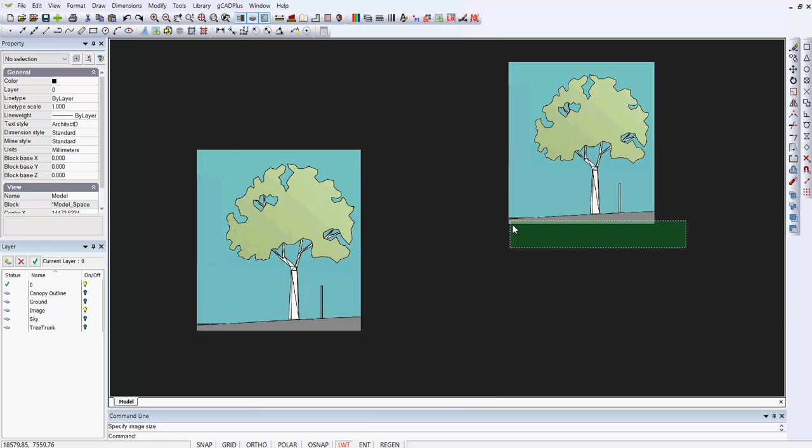So I'll delete it. The next step is to trace over the various elements in the logo to make a CAD version of what was a file done by a graphic designer. Well, if you've been following along with the other movies in this section, you'll know that it's relatively easy to use the polyline command to trace over the top of a graphic designer's logo. So we're converting the graphic designer's logo into one that we can use, and it's just Draw Polyline.

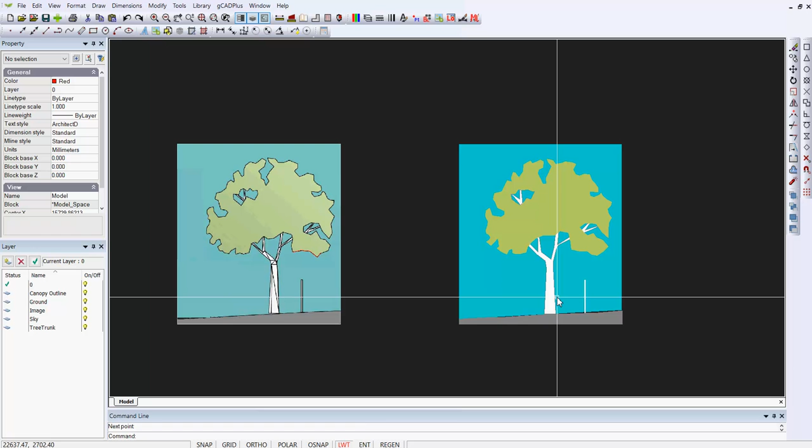I'll zoom in on the canopy, and I hope you can see, because I've got drawing colour set at red, the red line just follows around the external of the polyline. So I'll hit escape, and that's left a little polyline there which I will remove in a moment. But everything on the right hand side is a CAD entity. So if I pick, say, the trunk here, it's a polyline.

So at this point we could just get rid of that graphic, and we'll get rid of that one that we just threw in there. I'll take the trouble to go to Format and Images and just delete that reference, so that's gone. So now we have our graphic ready to become a logo. I think you'd probably want to add some text to it. You might add the text underneath here.

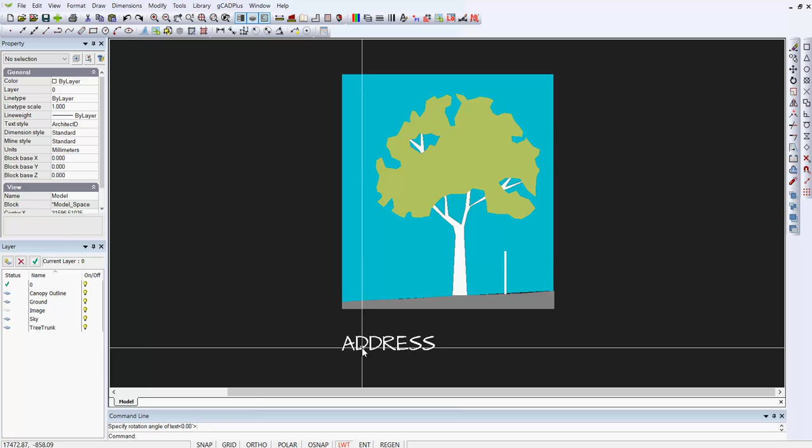So let's change our drawing colour to by layer, and we'll say Draw Text, Single Line Text, and we could put the address in and put it there, and maybe a height like so, an angle of 0, and then we could copy that, and we could change that piece of text to My Design Studio.

So we now have our little graphic piece of text. That'll be your Design Studio name and the address, postcode, whatever information you want on it. Although this is probably enough, you might even leave out the address at this stage, and we'll just have My Design Studio, and we can add the other later when we form a title block. So this is a logo, and this is the point to save this as a separate drawing, and we'll do that right now.

We'll go File and Save As, and we'll put it on the desktop, and in fact I'll take caps lock off, and we'll call it Logo Pass 01. So we've saved it. It's a good habit to get into that.

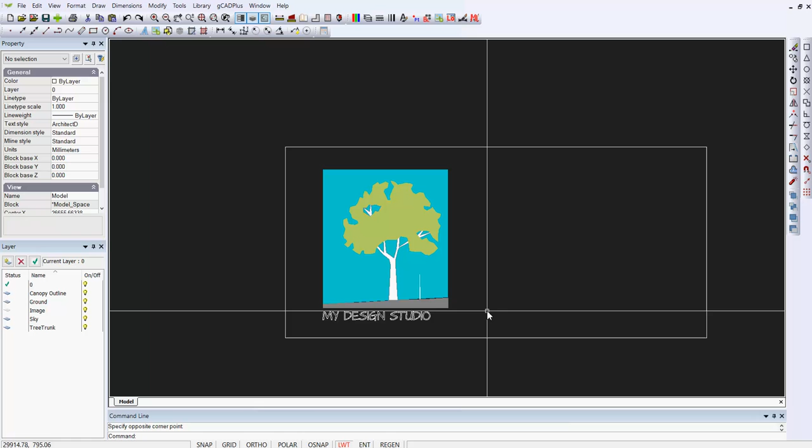So the next thing we want to do is to imagine that this was sitting in a title block. So I'll say draw a rectangle, something like this. We want to leave some space over here on the right for the address of the location and so on. So now we could do a Save As on the desktop. We've got Logo Pass 1. We could call this one Logo and Title, and we'll overwrite that one there. So we've got logo and title now all in one.

You could do something interesting by putting a fillet around the corner, but more interesting, we need to get this to a size that will work for us on a typical A2 sheet in the metric environment, or a typical, say, architectural C sheet in the US Imperial environment. The next step is to size this logo and its title block. Let's measure roughly from one side to the other, and I've got 35,000 units. The size of this is going to very much depend on how you put the graphic image in.

What I'm now going to do is draw a line, and I'll just put a line somewhere down the bottom, and I'll move off in the direction to the right. I'll turn polar on, which is clicking in the status line on the word polar, and I'll just type 100, and I'll hit the enter key and then exit from there. You may be able to see a tiny line down here at the bottom. That tiny line is in fact 100 units in length, and that's a reasonable size for a title block and logo.

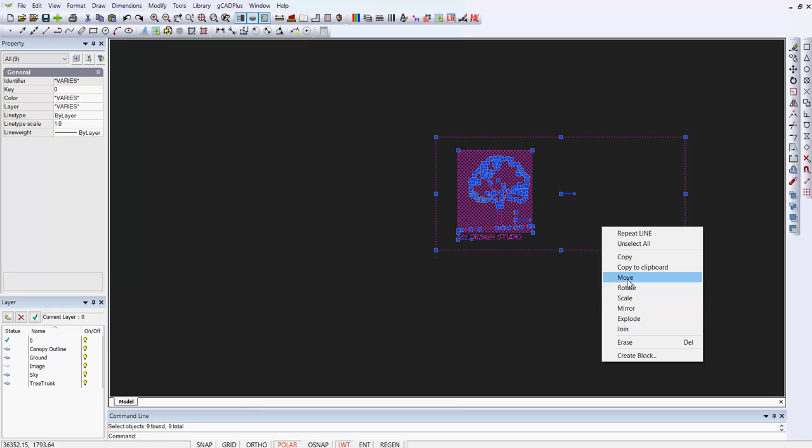So we need to scale this, and the way that's done is select everything there, the rectangle and the logo, right click and pick scale, click down on the bottom left corner, then come up to, say, the right corner and then scale down, and you should be able to see the logo scaling down. I'll do this in a couple of steps. So I'll click and then unselect all, right click and zoom extents. There's our line and there's our logo, so we still need to scale it further.

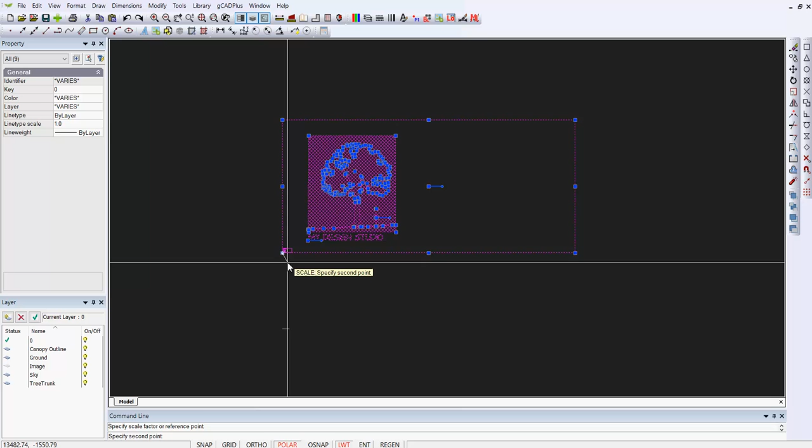Select everything again, scale there, go out to the right and bring it down to somewhere close, if you can get it somewhere close to the 100 units. Now I'll grab everything. There, we'll zoom extents first, so our logo is sitting up here. I'll grab everything in there, right click and move, mark a point there, and then just move it down near the 100 unit line, and I'll zoom extents. Now you don't have to be too fussy, it's not exactly 100, we just want somewhere near it.

But we're going to save this as a single file, and we'll use it and insert it in any drawing that we do in future. What I will do is take the opportunity to select everything and move the bottom left corner to coordinate 0,0. That's using the 0 on the top row of my keys, not the numeric pad, and hit enter, right click, unselect all and zoom extents.

So we can now save at this point, and the title block and its logo is about the right length to put into a layout space. And the next little step here is to show you how that's done. So our aim is to use this information over and over again, and to do that I want to save it as a separate file. So it's file and save as, and we'll overwrite that earlier one, logo and title. So it's the right size, we'll replace it, and now we can close there.

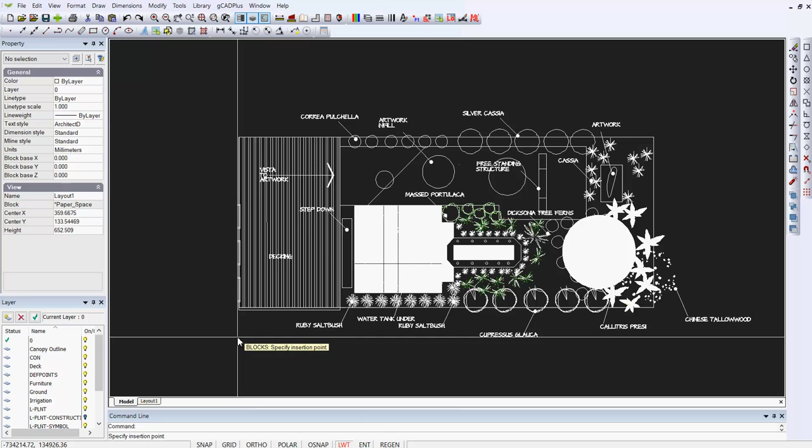So now we go back to model. There's nothing in the model at the moment, and everything that you draw in model space is full size. So we're going to repeat the same technique. We're going to say let's insert a block, and we'll retain it as a single block, and we'll say add from another file, and I've picked up one from the design area of the library, and I'm going to say OK, and we're going to insert it into the drawing. So in comes the block, anchored at the left hand side. I could type 0,0 for my insertion point, but we'll just leave it at that point.

So now when we go to layout, we right click here and say add a viewport. I'll add a viewport like so. It's just a porthole into the design. Then when I double click on it here, I can adjust what I want to show in that space. So let's display that on the layout.

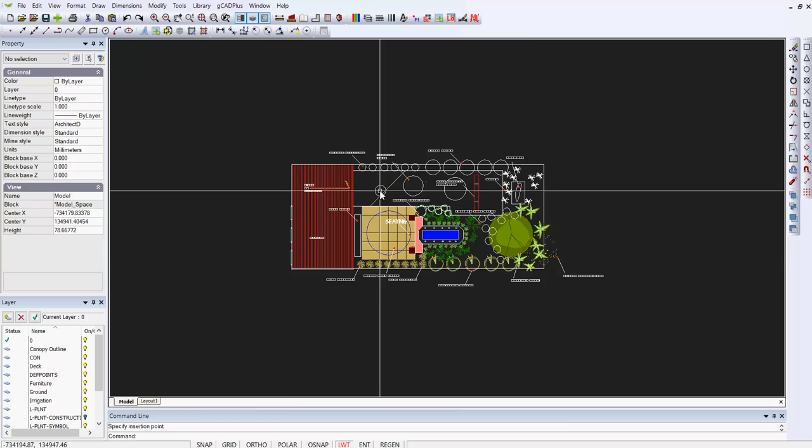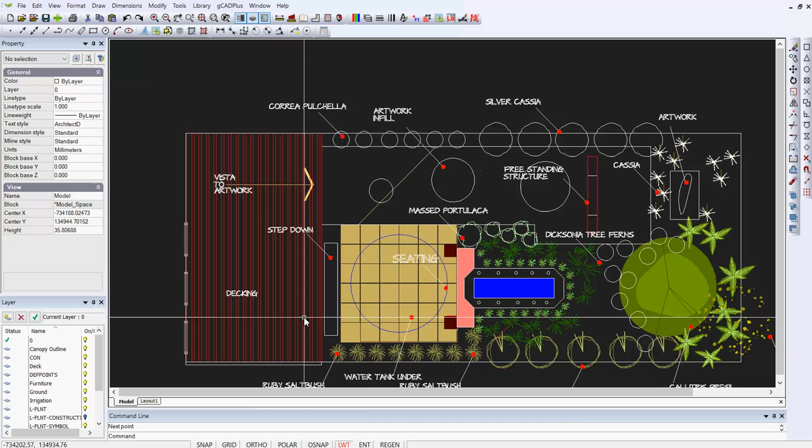So can you see that the design is now showing, in this case on an architectural C size sheet, and when we go into model and we make an inquiry of the drawing, so let's say how far is it from the back of the deck to the back boundary, you can see it's 39 feet. So this is a true model drawn with decimal feet as the base. Exactly the same applies in the metric area, except that your numbers will be larger because the base unit is millimetres. So whatever you draw in full size appears in the layout space, and our logo sits in there as a separate little drawing that we can use over and over again.

The final step might well be to pick the floating viewports that we see, and we'll just adjust the colour of these. We'll say we're going to select colour and we'll make them white on a white background, unselect all, and everything that's in the floating viewport changes, but in the block here we still see the boundary of the block. Now you can edit the block at any time by selecting and editing the block, and here you could put other information on the location of the site, your email address and so on.

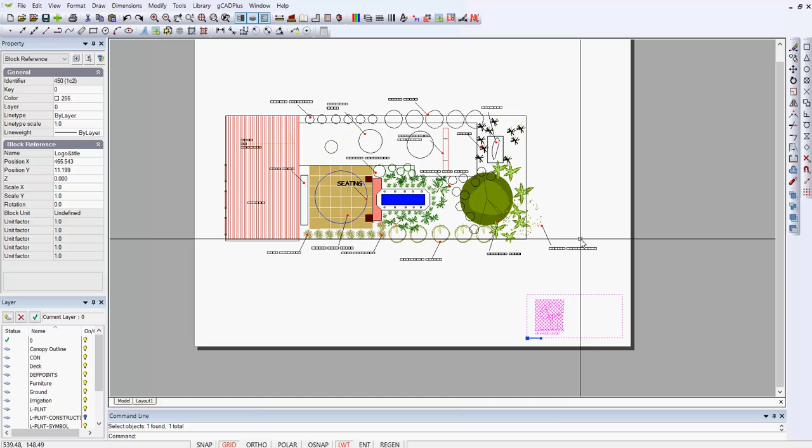But I think there's well and truly enough information in this little series. What I hope to have shown you is that your title block information is saved as a separate drawing, it's inserted into layout, and then you work in model space most of the time. Whatever you put and draw in model space can automatically appear in the layout space along with your appropriately sized logo.